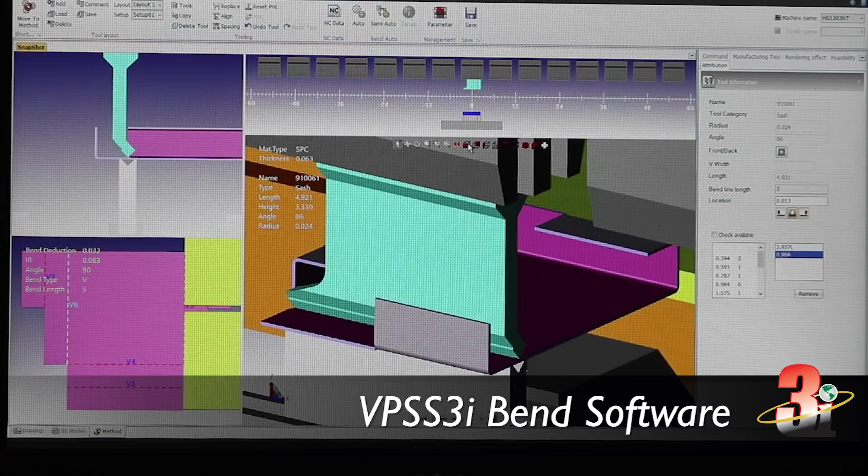Software is really becoming a big part of the equation now. Having the best machine is good, but if you don't have good software to go with it, you're really not getting the full use out of that piece of equipment. One of the things I saw for Amada was the latest version of their software was so much ahead of what I was using at the time. I looked at about 4 competitors in the software end of it, and it was superior to what they had. So here I had this great machine coupled with this new software, and it was a perfect fit. Very happy with what happened.

Hi, my name is McCarthy. I'm president of Metko Inc. here in New Holstein, Wisconsin. The company started in 1971. My father purchased the business. It was a very small job shop at the time. I came with them in 1978, have been here ever since, so it's almost 40 years.

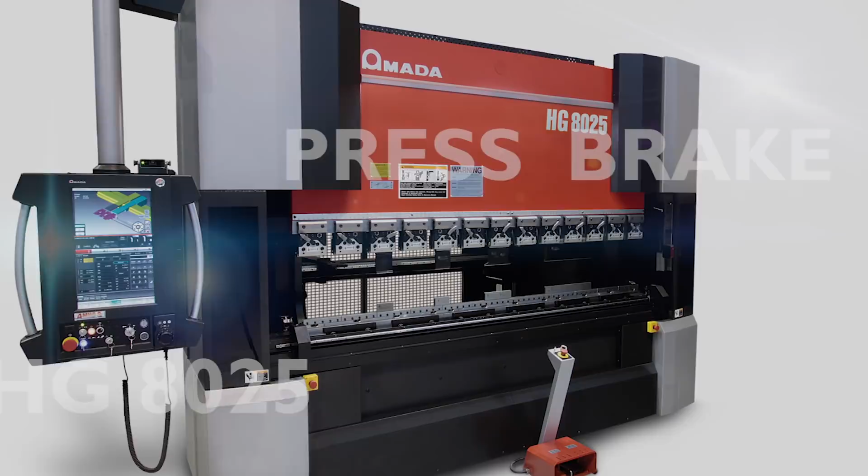Early on, I hooked up with Amada. I just saw them as a leader in the industry. We started with the turrets, then we added the lasers, and now we've added the press brakes. We have 2 robots here for welding, so we've embraced that quite a while ago. That was our first really endeavor into doing programming offline of some type of a 3D operation.

My son is more on the admin side and sales side, and my son-in-law is more the hands-on production type person. So I think it's a good match going forward for them to grow the business beyond where I left it for them.

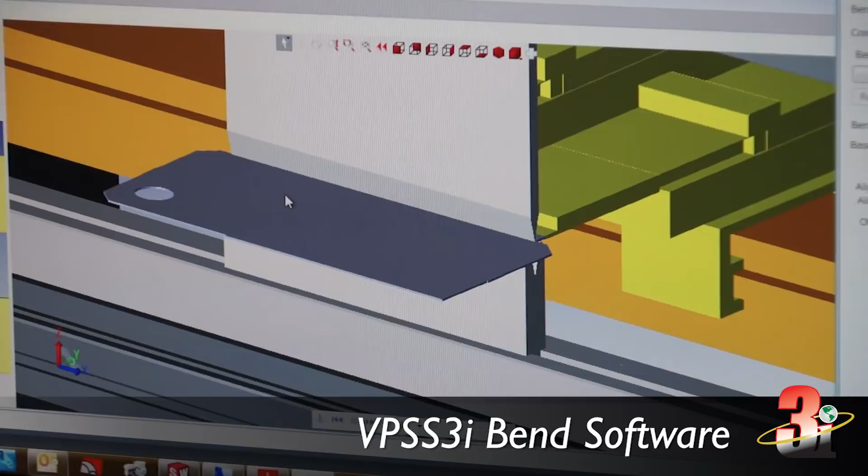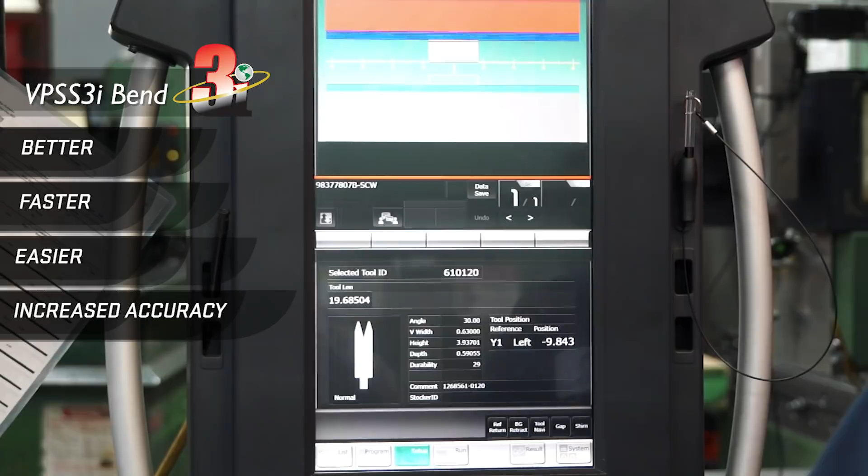My name is Patrick McCarthy. I'm the business manager here at Metko Incorporated. The software from Amada has been key to our growth as an organization. It allows us to produce parts better, faster, and overall more accurately. The usability of the software is much easier for an operator to pick up, learn, and hit the ground running faster than it was with other previous softwares that have been out there. The future of the business is certainly in technology.

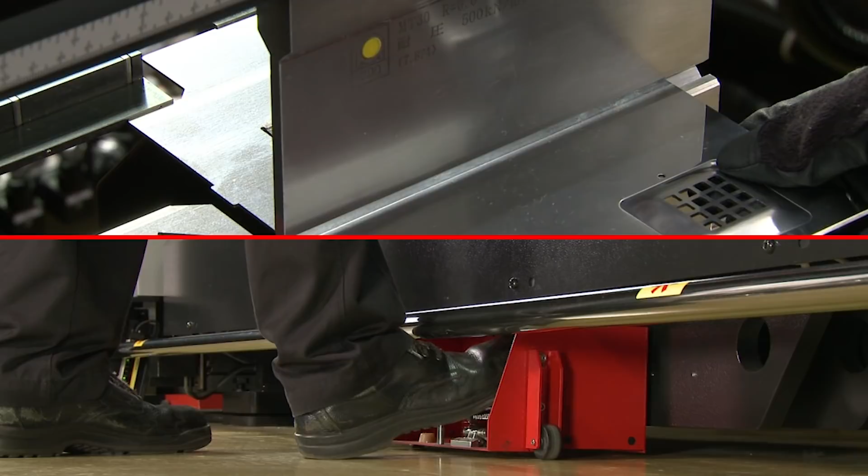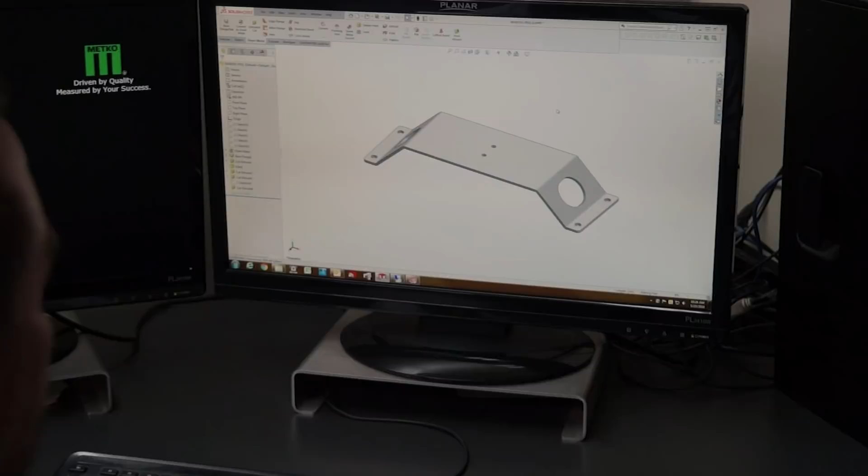My name's Tim Ellenbeck. I'm from Metko Incorporated. I do the programming here for most of our machines, our Amada lasers, our brakes, our turret punches, and now our new ARS system.

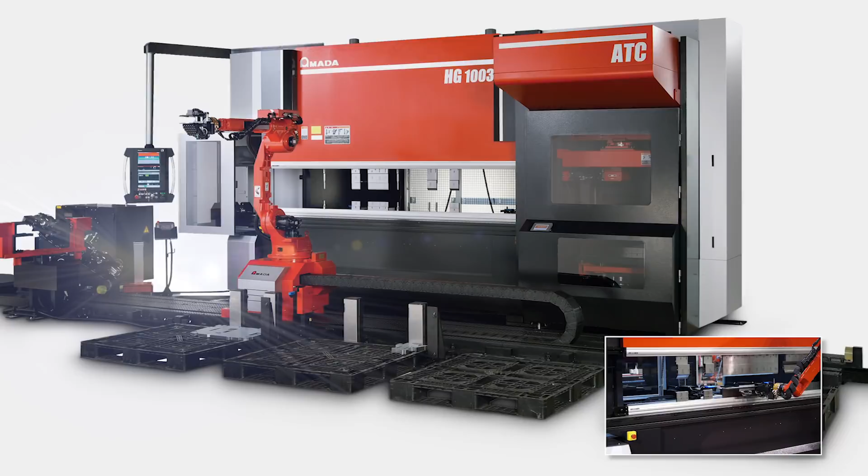When we brought in the 3i software, it was more intuitive. I'm very familiar with CAD and SolidWorks, and it could bring that in. All the bends, all the radiuses, bend deductions, all come straight into the 3i software. I don't have to adjust anything.

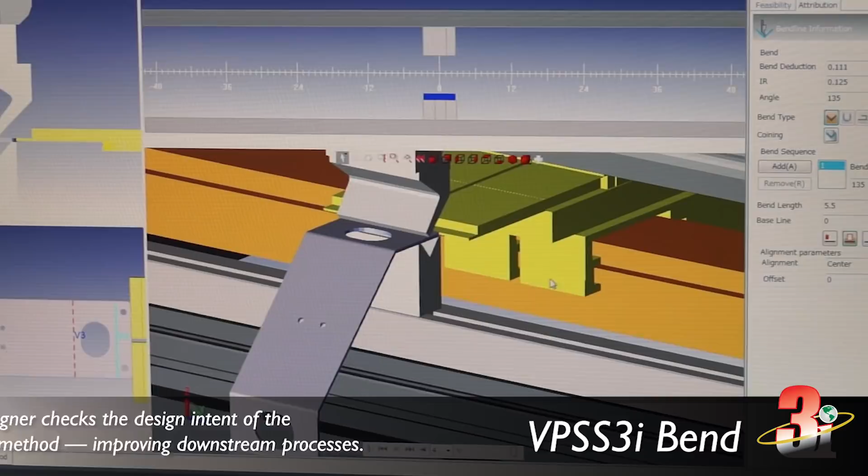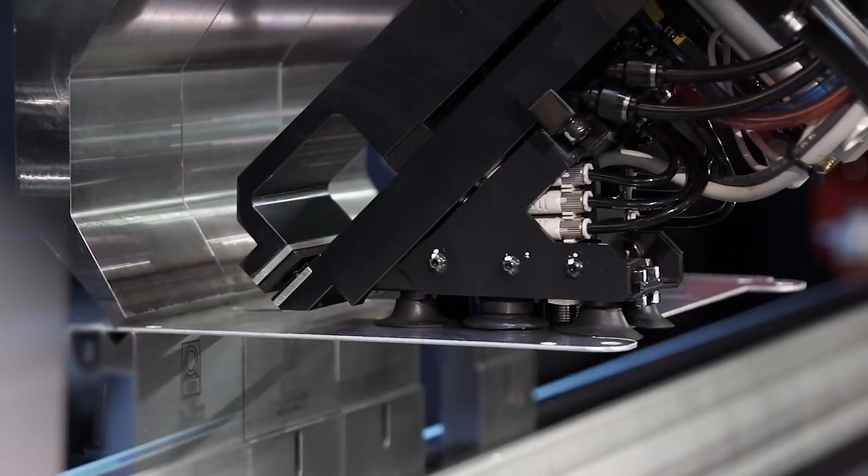The 3i software does a very good job of putting the back gauges in the correct spot, handling machine functions such as retracting the back gauges, or any back gauge function that it wants to do. The production designer reduces setup and reduces downtime at the machine. It's a very simple process.

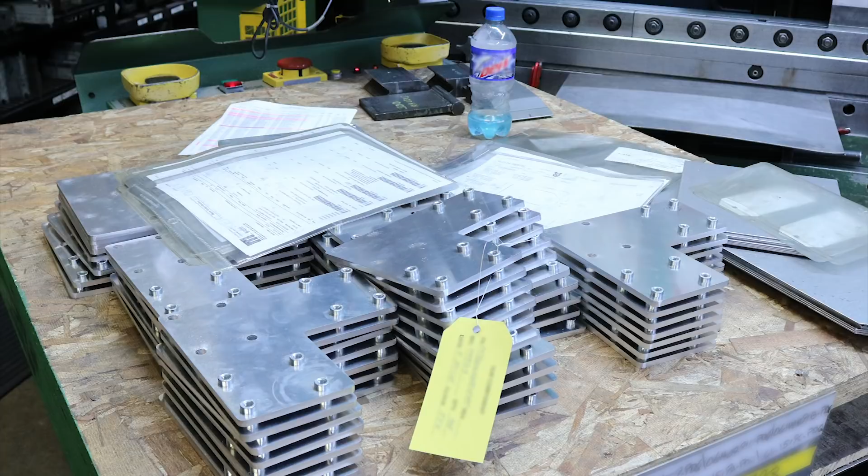My name is Eric Berger. My title here currently is Asset Utilization Manager. My background comes from engineering and manufacturing, while Patrick has a business background, so the two of us mold real well together and create a good team going forward.

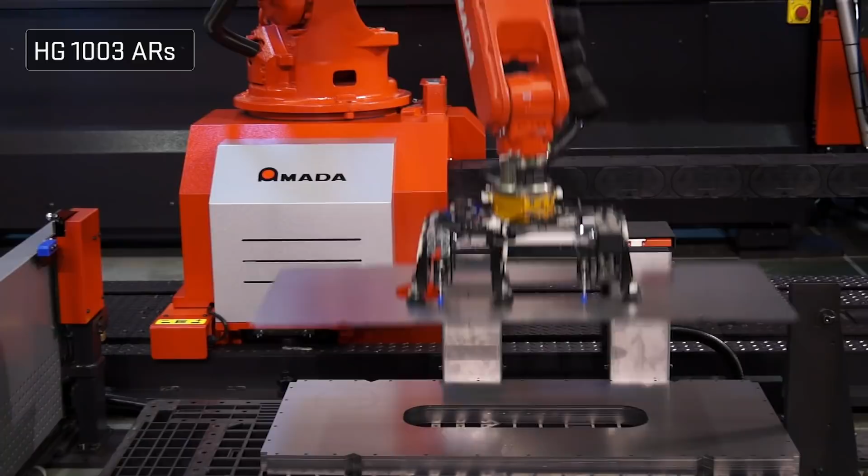We really couldn't ask for a better partner from an equipment manufacturer than we've had with Amada. We love Amada. Amada is a tremendous partner in this dynamic environment that we are in. The speed of technology is moving at such a pace that it is critical to have a partner in that environment.